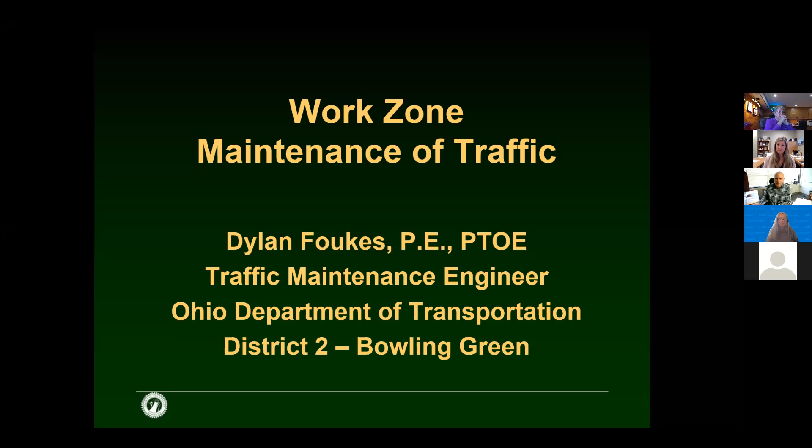All right, so yeah, that's what we're here to talk about this afternoon. This is me, Dylan Foukes, traffic maintenance engineer, Ohio Department of Transportation. I'm in District 2, which covers, we're out of Bowling Green, which covers the 8 counties in Northwest Ohio.

There, it finally goes. So we're talking about work zones, we're talking about temporary traffic control in those zones, and what is the purpose of it? We're trying to communicate with road users what's going on through a roadway that has been affected from its normal operation. Normally, on a typical day, you don't have anything in the roadway. Well, then all of a sudden you might have maintenance activities. You could have something, the road could be flooded. There's a number of things, you could have a utility pole that's down. Whatever has changed from normal roadway characteristics due to some type of thing that's now in the roadway, we're having to deal with how do we get drivers around this area, either through the zone if there's room, or if we have to detour them another way.

All these things I'm going to talk about today come from the Manual on Uniform Traffic Control Devices. This is a federal manual that covers throughout the U.S., providing the minimum standards for all public roadways. Each state and even local municipalities can go above and beyond this. In Ohio's case, we have the Ohio Manual on Uniform Traffic Control Devices, so we have things that build upon what's set as the minimum. You could even have municipalities that go even a step further, but that's what we're working off here.

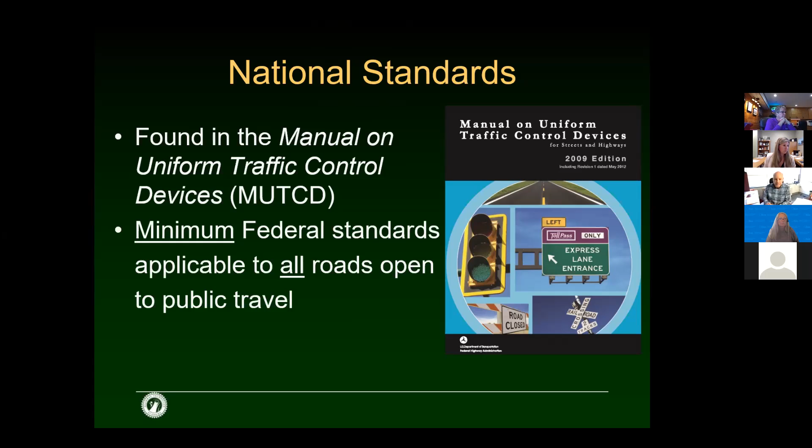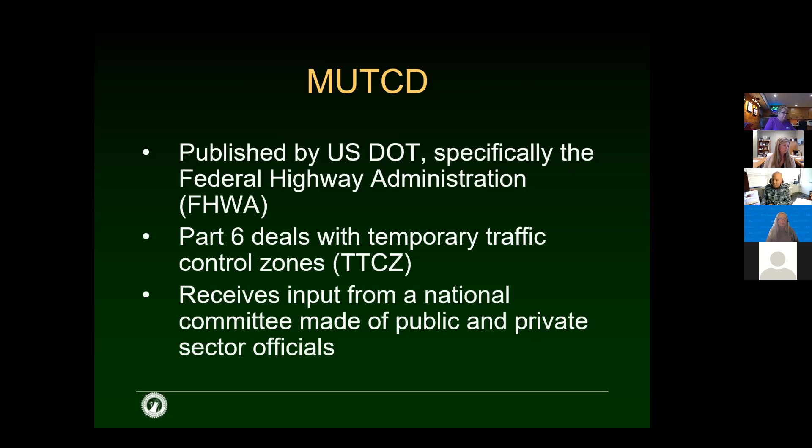Again, this is something that's published by the US DOT. I'm going to talk about part 6, which is temporary traffic control zones. This is updated - we're actually working off one that's from like 2012 right now, so they're discussing a new one coming up soon. There's been discussion about different formatting and different things about it, but I know there's a national committee now that's looking at releasing a new update. Each of the parts within the MUTCD get updated, and each state then looks at it and decides what they want to build upon that.

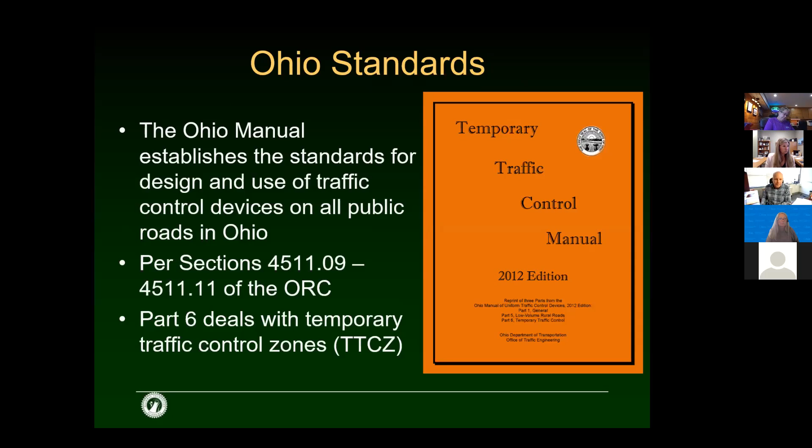So when we're talking about traffic control devices, we're talking about signs, cones, barrels, the arrow boards that you see out there that tell you the lane's closed, message boards that are helping provide extra information, pavement markings that we got to change due to whatever type of work is going on there that's long-term. Then we have our barriers that are either there to protect the workers by keeping vehicles out of that zone, or if we're just talking about barricades and things like that to help tell drivers they need to go a different way.

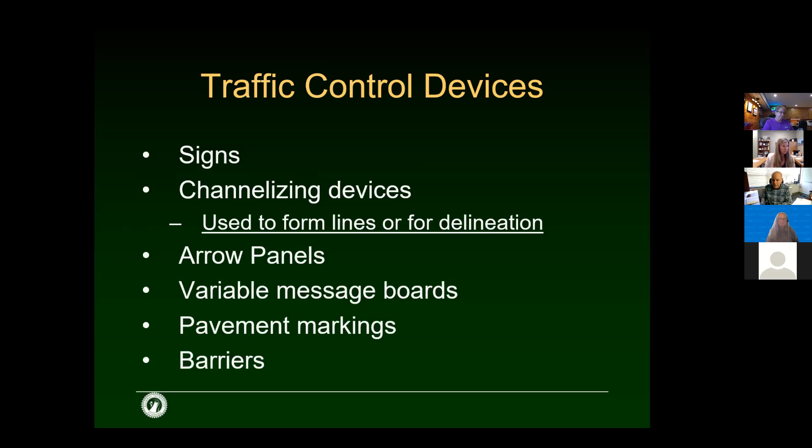So when we get into the work zone, it's made up of a number of components here. First one is the advance warning area. This is where we're going to start telling the driver that something's coming up. You got to let them know, hey, up ahead there's something that's not part of the normal roadway. And how do we do that?

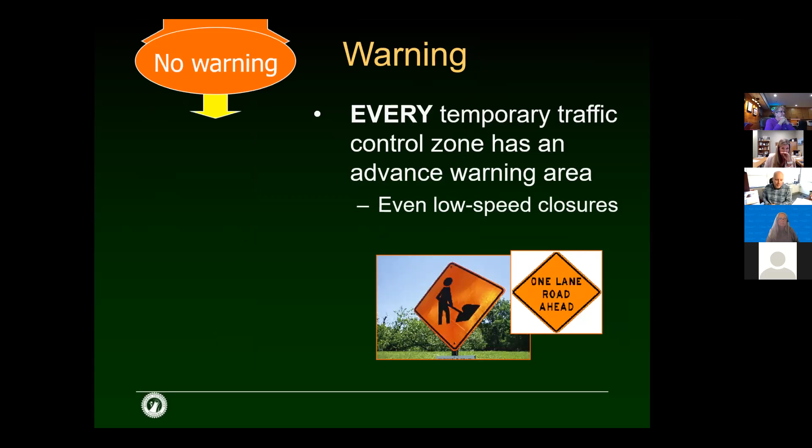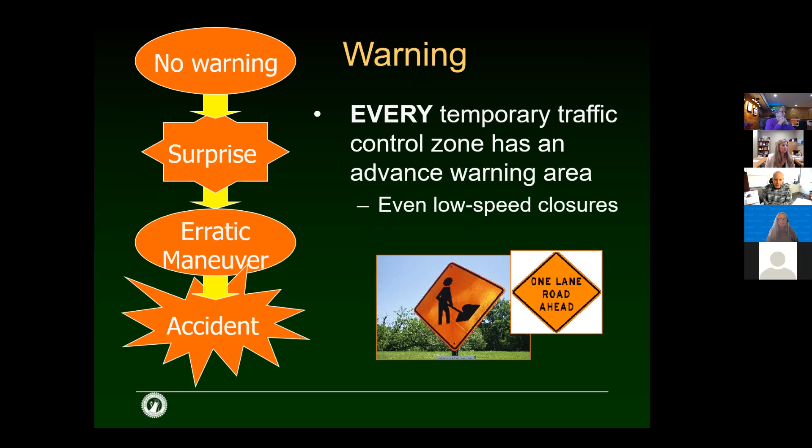We're doing that with signs. Typically, the signs are out there telling people that something's coming up. If you don't do this, as you can see in the little graphic there, there's no warning, it surprises people, and you may end up having an incident. So that's the key - get those signs out there and make sure drivers are aware of what's coming up.

So again, get their attention. Road work ahead is the first sign people always see. Then you got to tell them what the situation is. In this case, if you're on a divided highway, like I-75, you're going to say right lane closed. And then you got to tell them what to do: they got to merge left. So those are the sequence of things you're telling people as they're approaching a work zone.

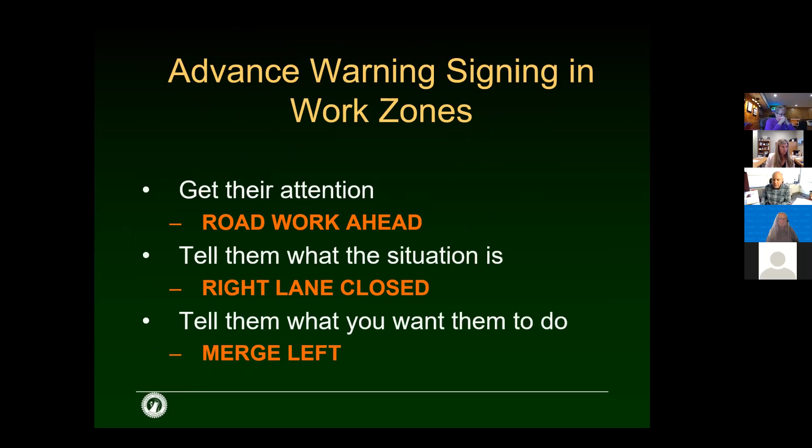Sizes of signs, the sizes we put out there, anything you see, we have those roll-up signs, which we'll show a little bit here, but those are all 48 by 48 inches. Those are meant for high speed, higher visibility. And as you go down in the lower speeds, you can go with smaller sizes.

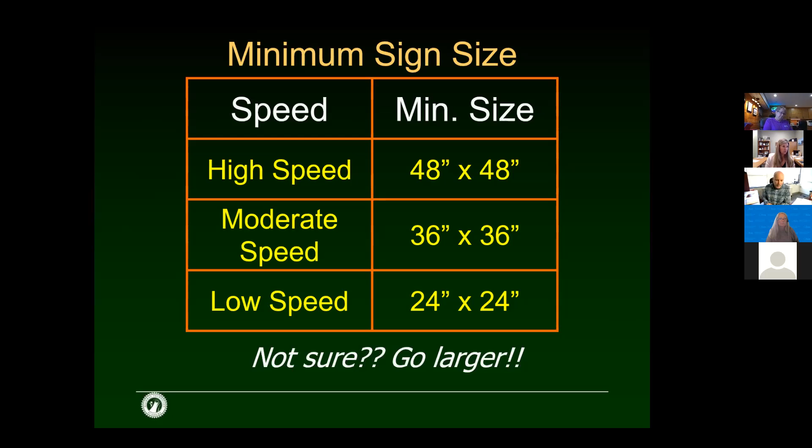Positioning of signs, you want to put them where they can be seen. On a divided highway, you put them both in the median and on the right side of the road. You're trying to get them in a place where people can see them easily and have time to respond as needed.

Unfortunately, when you get into a downtown or urban environment, it's harder to find places to put signs, and also you're fighting for people's attention with all the other things going on. You got parked cars, you got storefronts, you got their signs. So there's always a lot going on in a downtown area that you really got to try and get people's attention.

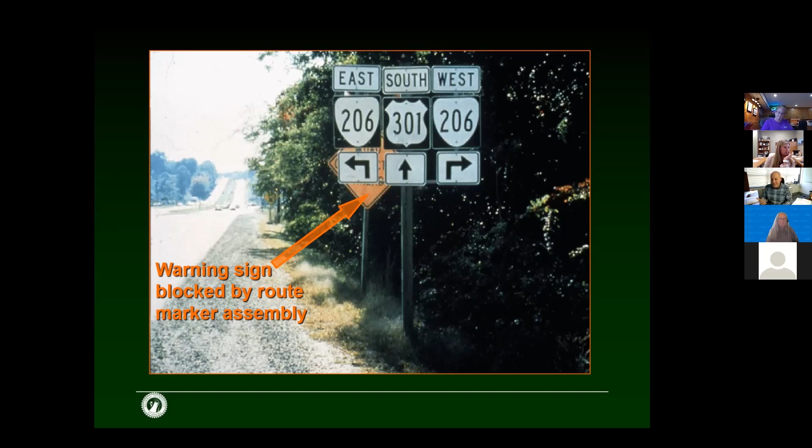This is just a personal pet peeve of mine. There's a sign in place, and then they go put the warning sign that there's construction right behind it. Now in this case, probably somebody had a plan that said, here's the plan for our project, and all they did was follow this. It says it's supposed to go at station 150, so they go out and put it in at station 1 plus 50. Well, they didn't take into account that the sign's there. Maybe that wasn't there when the plan was created, but it's there, so you got to make adjustments. You got to think about, hey, is this really something someone's going to see? It's kind of pointless to stick it right there behind that other sign.

Also clusters, that's another thing you want to avoid. You have enough things out there trying to get people's attention, and you don't want to put them all with the other signs around it. So in this case, you either want to remove or cover those other signs so that people can see the ones that are critical to what you're actually doing on the roadway.

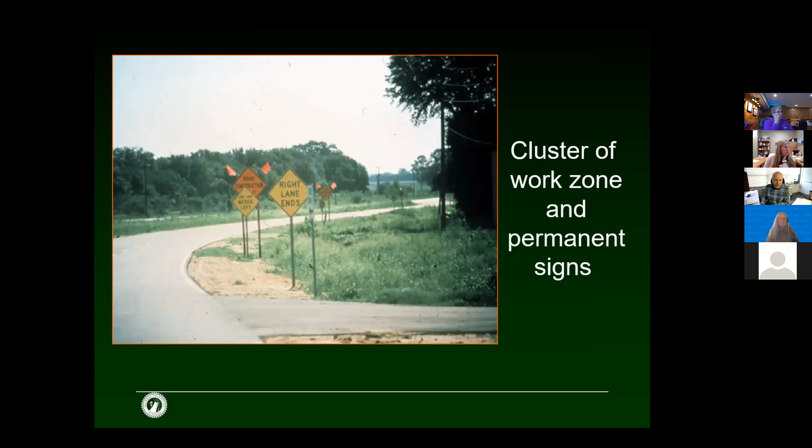Sign spacing is another thing, just like sign size, it's a function of speed as far as how far apart they're spaced out. And then also the environment - like I talked about, in urban areas you're going to have tighter spacing, and you also got to deal with curbs and pedestrians.

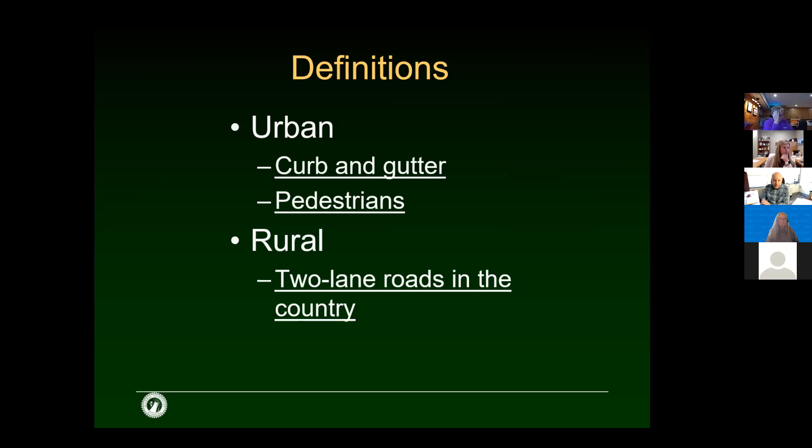Rural situations are a lot easier to deal with. They are higher speed, but usually have a lot of room out there in the rural area. And then expressways, freeways, I-75, we're going to have a really long gap in how far out we place those signs, because people are traveling 70, 80 miles an hour. So you need to space them out further so they have time to comprehend it and then react.

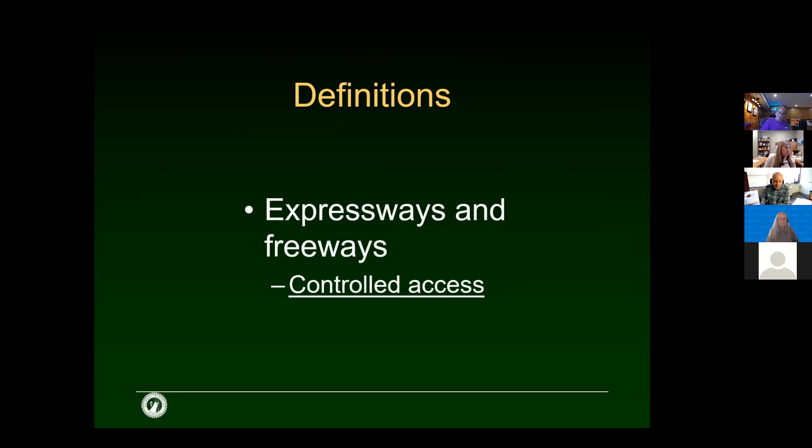Here's a chart that shows the type of spacings that you see.

The next slide shows it - the A, B, and C positions. The A is closest to your work area, the B is intermediate, and the C is the farthest back. If you go down to the bottom of the chart, you see 1,000, 1,500, and 2,640.

So you're really looking at basically a mile when you add all those together, from where that first sign is seen - the road work ahead sign - to when you're actually getting to the point where you have to do some type of maneuver, like a right lane closed. Going to that bottom case, a mile back, that's the C position - that's where your road work ahead sign is. The next one, B, is where you'd say right lane closed, and the A location would be telling you you've got to merge left.

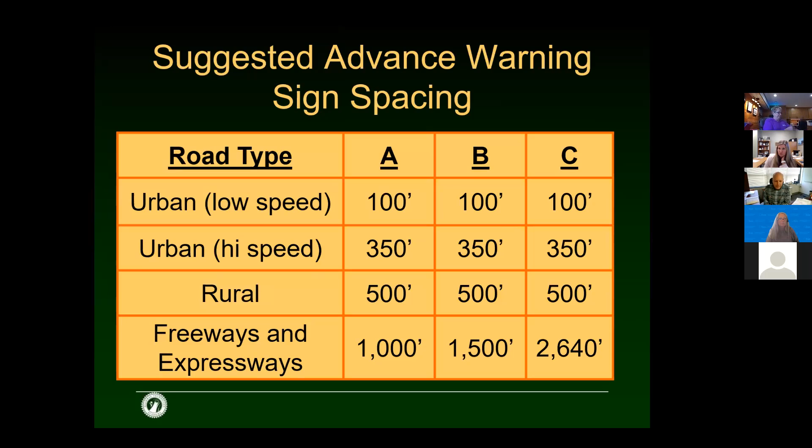So going back here real quick, in a rural location, a 2-lane road where you're just doing a flagging situation, you're going to be looking at 500, 500, 500. Pretty easy - it's easy for our guys setting up signs in the field to know that we're out on our 2-lane country road, so it's 500, 500, 500 to set these signs up.

Height clearances. Now these signs that we're placing are for temporary use - they could be up for a couple of hours, a couple of days, or months, depending on how long you're going to be out there. Typically for our short-term projects, you just have to mount it at 1 foot off the road.

Going back here real quick - post mounted. We're going to post mount signs that are there for a long time; we're not putting them on a temporary type of support. These are the ones where you're going to drive supports into the ground, and they're going to be there a long time. So if you're in a rural area, that's 5 foot to the bottom, and in urban areas, 7 foot.

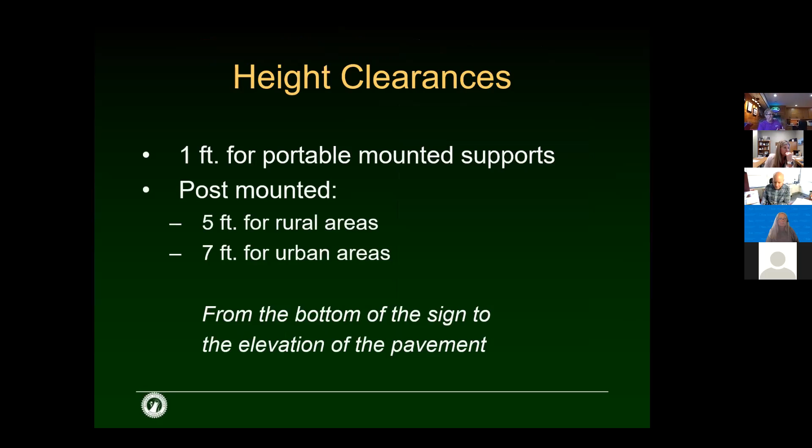And here's that sign, and here's something you would see post mounted. That matches what our typical permanent sign is actually. So that's what you're going to have up there for a long-term type of project.

Again, here's showing urban, 7 foot. You want to get above so you're not blocking any sight views and people aren't banging their heads on it. Not that you have a lot of 7-footers around, but you never know.

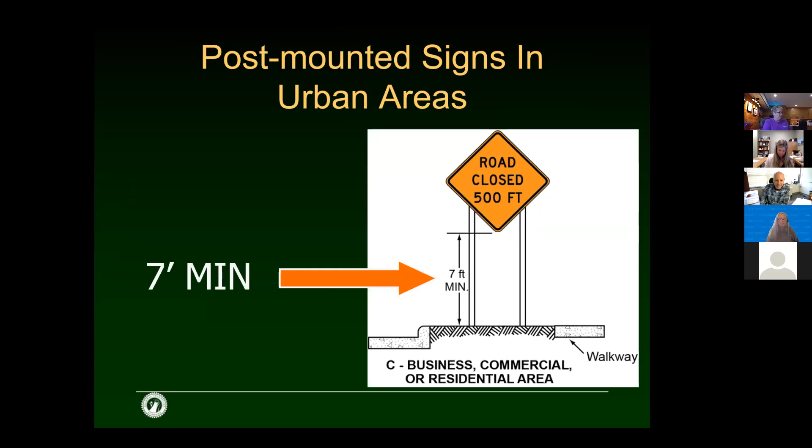So we're talking about tapers, taking people over from a lane that's closed, moving them into the lane that's open. That's where our cones and barrels, and if it's barrier wall out there, we're going to have that - all those things. If it's long-term, we're going to have pavement markings that match up with that as well.

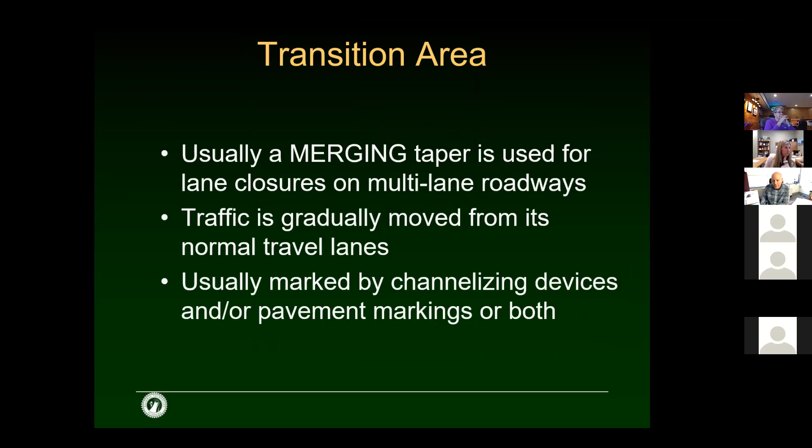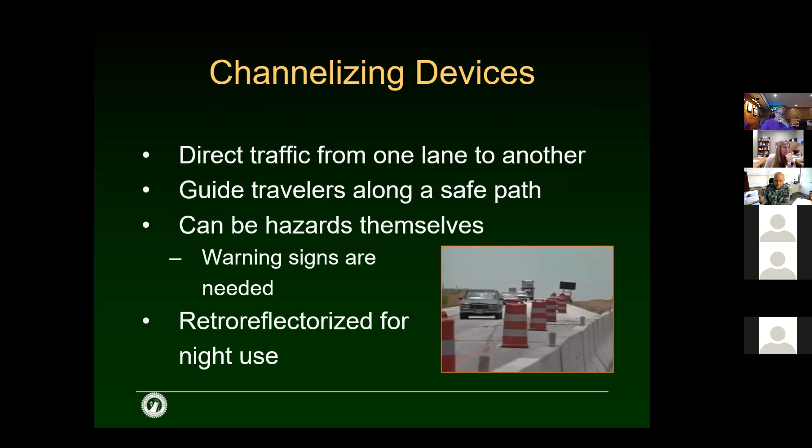The devices that we're using are referred to as channelizing devices. They're there to direct traffic from one lane to another. They're reflectorized for nighttime - we used to have to put lights on all the drums that we put out there, but the sheeting has gotten so much better over the years that we don't need to put lights on them anymore. The light coming back from the headlights is enough for the drivers to pick up easily.

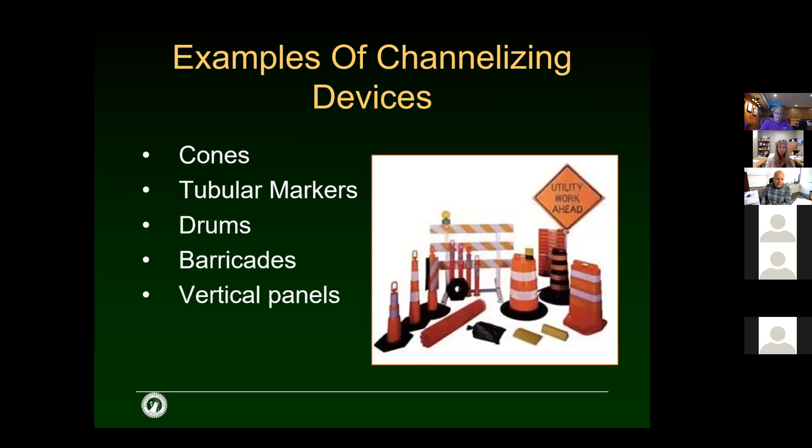Here's just a variety of them - you've got cones, drums, tall skinny barrels that we call grabber cones because they've got a little loop up on the top. Those are the types of things that we're typically looking at.

The cones and tubular markers, depending on your use, can be as small as 18-inch for a daytime low speed, or 28 inches - that's what we buy for all of our stuff, 28 inches. But we won't use those on the freeway.

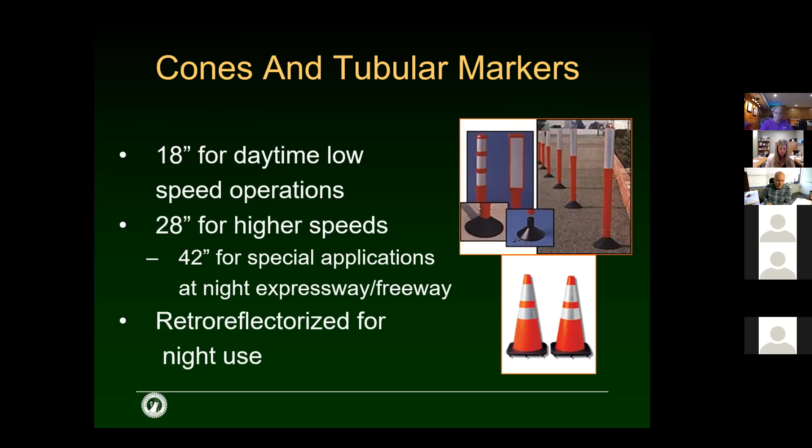When we go out on the freeway, we're using the taller 42-inch grabber cones, which you'll see here. This is a type, so it's still considered a cone, but it's kind of a skinny barrel. It has the height, and it just gives people more of a target to avoid, I guess, better than a cone.

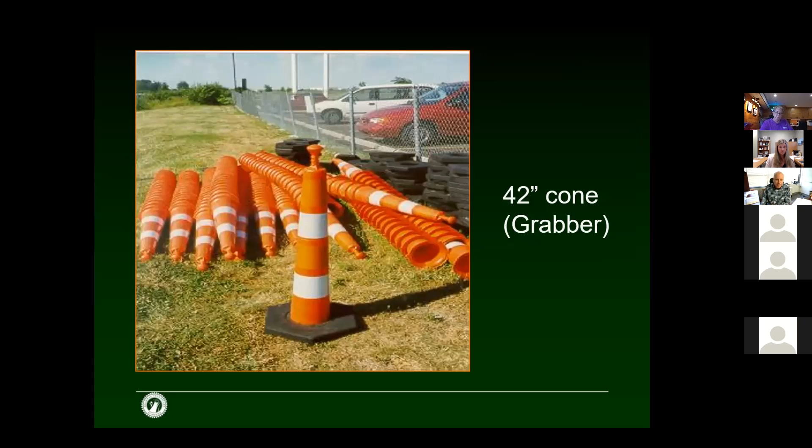Drums are the biggest thing that we put out there as far as channelizing devices, so it sticks out further and people don't want to hit them, so that's a good thing. But every year we're buying new ones. We just bought some—we buy a couple hundred every year for our district because they get beat up over the summer, so you've got to replace them.

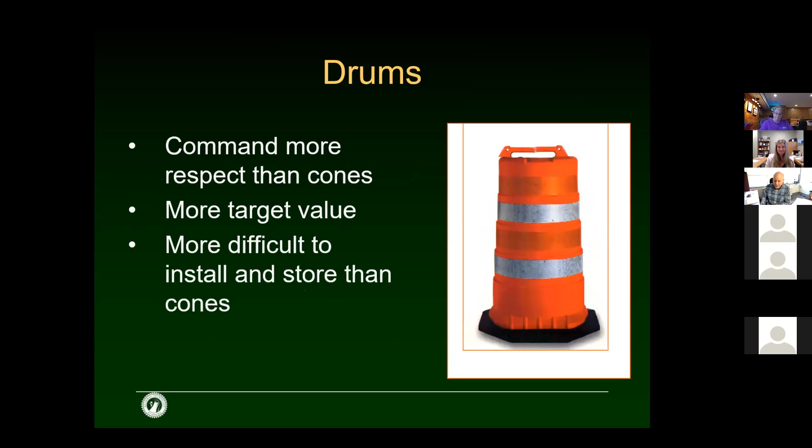Barricades—these are where you're coming to see a road's closed ahead. We'd hope everybody obeys these when they get to them. Typically you've got a road closed sign on it, but a lot of times, especially when a closure first starts, people just drive around them to see if the road's actually closed. But when those are up, the roadway is closed, so we hope people pay attention to that.

But the biggest thing these days is people's GPS—their Waze or Google Maps is telling them to go this way, and they're not aware that there is a closure. So it's not on their GPS, but they just go right by the barricade, even though it's saying road closed ahead.

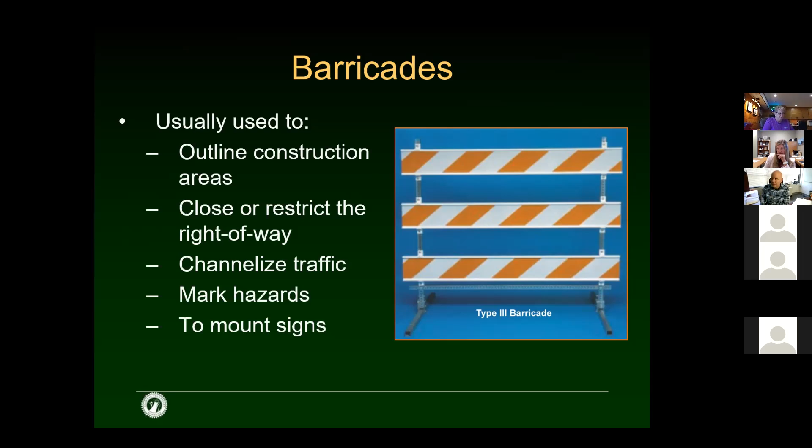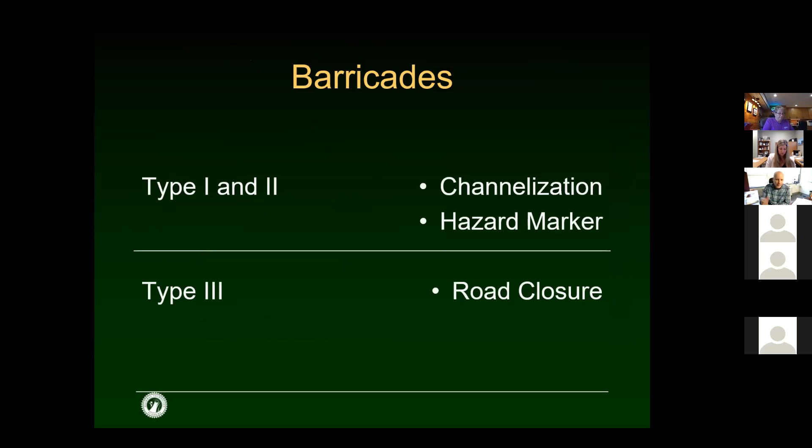It's actually 3 types of barricades—type 1, 2, and 3. All we use is the type 3 triple rail for our road closures. Again, that's just telling you what they're used for.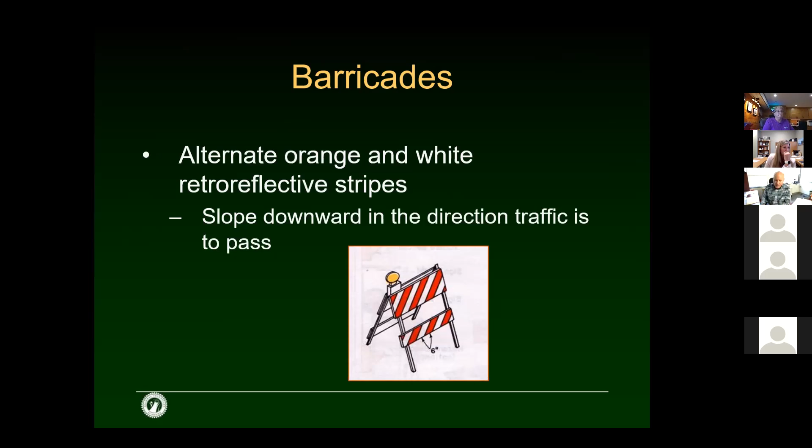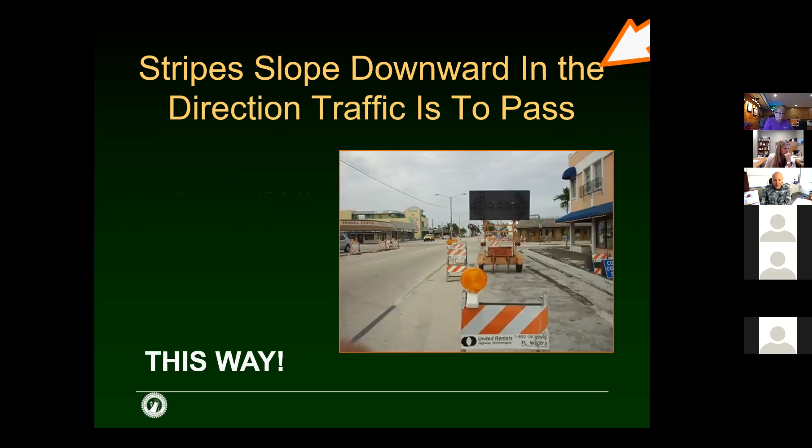They do have the orange and white stripes on them. Those actually—I didn't know this until I got started working in the transportation field—point to the way you're supposed to pass the barricade. The next slide shows you: the stripes are pointed basically down to the left, so that's the way you're actually supposed to pass the barricade. Not many people recognize that, but it's just one of those tidbits of information.

Now, spacing these out—again, factor speed on how far apart you're going to place your drums or your cones. As you see on multi-lane roads, it's 1 times the speed limit in feet, and then as you get into straight tangent sections, you can go 2 times the speed limit. Again, those are the max spacings. A lot of times when we're talking about these things we're either giving min or max—this is the max spacing.

The skip lines on the roadway are 10 feet of paint and a 30-foot gap, so those are every 40 feet. So when our guys are placing out cones or barrels, that's what they're using to figure out how far apart they're going to place those devices.

So if you have a 65-mile-an-hour road, at max spacing on the taper it's going to be 65 feet. But if they're looking at the markings, they'll move those in a little bit, knowing that the spacing on the pavement markings is every 40 feet. So that's how they'll space those out on those tapers.

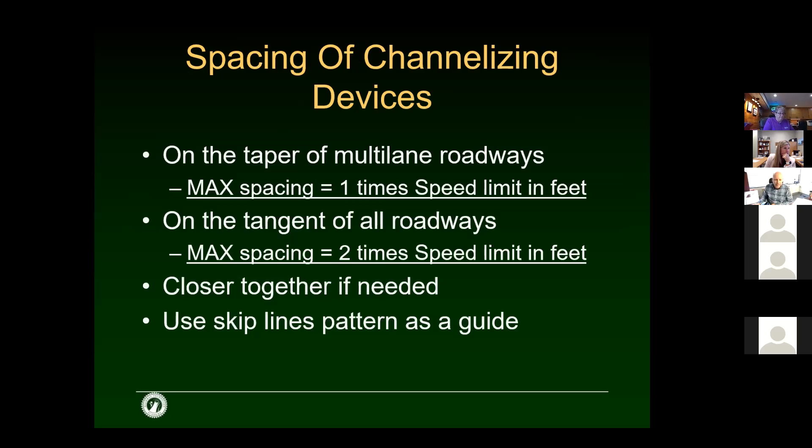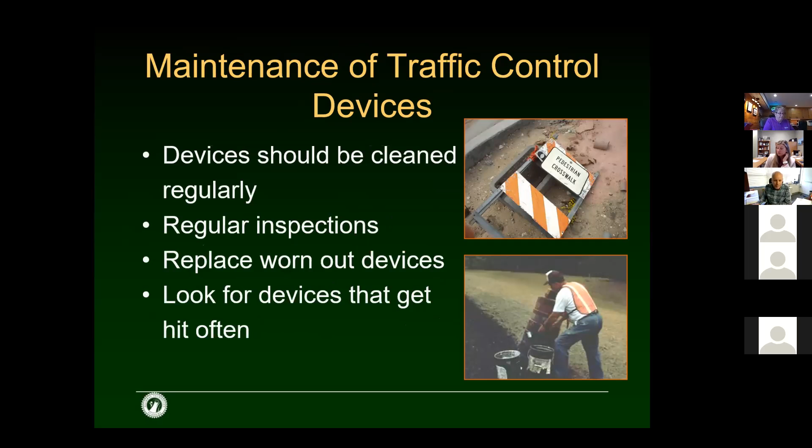Again, this is just talking about our devices—when they're out there, they should be in good shape, and this is in all of our documentation. When we have a contractor, you've got to keep these things in good shape. We don't want things that have been beat up or destroyed being out there, so we need to keep up on them and replace them as needed.

So now we get past the transition area and we're getting into the work area, which is basically broken into the buffer space and then the workspace. Workspace is where you're actually doing your work with people and equipment—that's the point of why you're out there. The buffer space before that is to leave space for any errant vehicles that happen to miss all the signs and tapers, and make a last-second maneuver to try and avoid things.

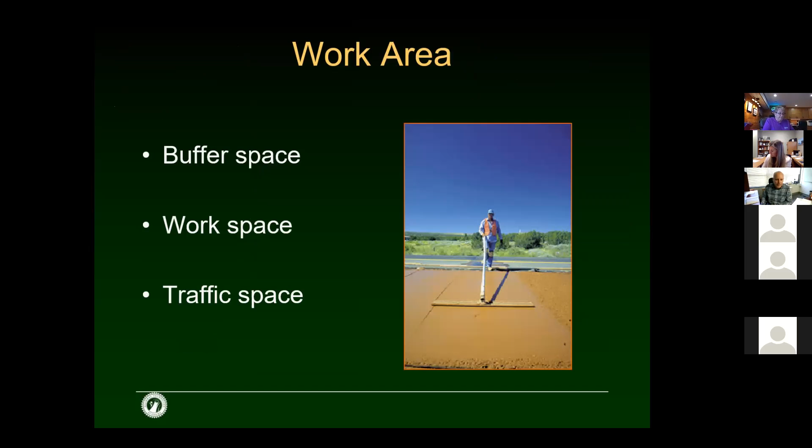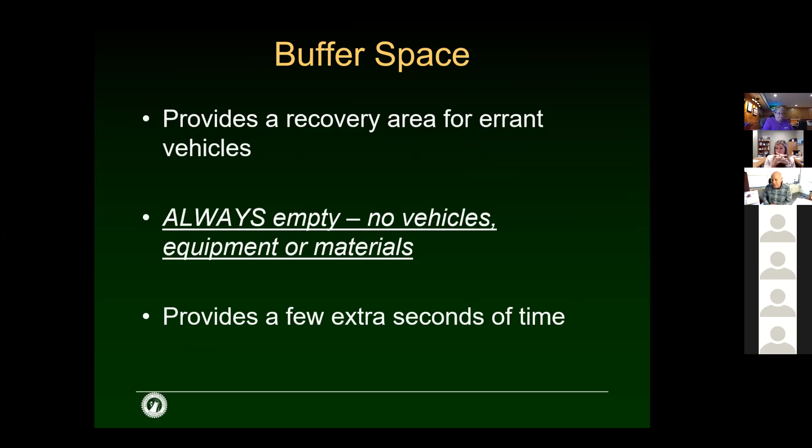Buffer space provides a recovery area for errant vehicles, and you want to keep it empty. You don't want any fixed objects in there, and you don't want parked vehicles, so that if somebody blows through the taper, they're not going to hit a vehicle. You need to keep those empty.

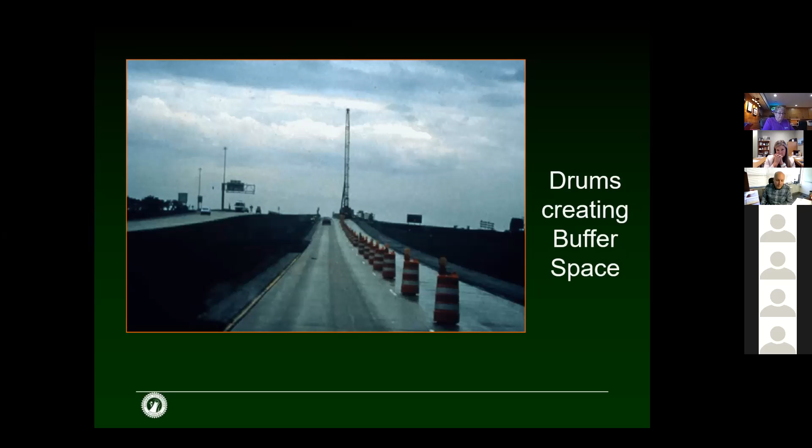Here's a diagram of it. Sorry for the old photo, but you can see there's a bridge project here, with a crane sitting up in the lane that's closed. You've got a long buffer area in case somebody blew through that area. You don't want them to run into the crane. So that's how you give them some time before they get there.

Again, it's a function of speed. On an interstate route, 65 miles an hour, you're talking 645 feet. So it's a substantial distance that you're going to put in there to keep it clear.

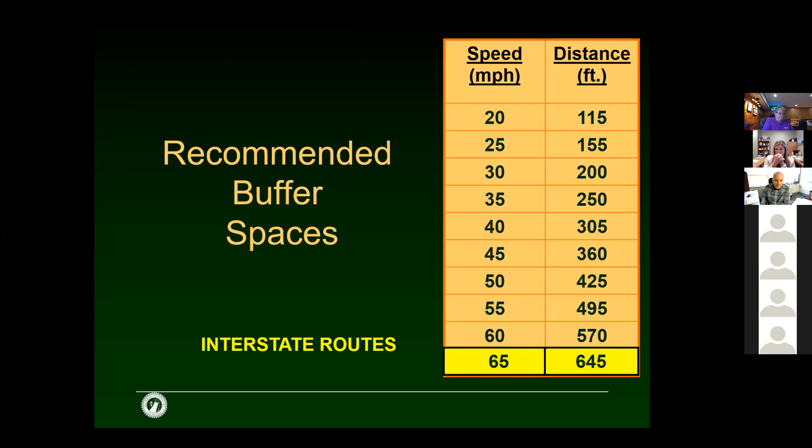That gets us into the workspace. That's where we're actually doing the work. Overall, we're minimizing the conflicts in that path with the traffic space around the work area. That's highlighted here - that's the lane that's free and clear that we want everybody in to get around our work area.

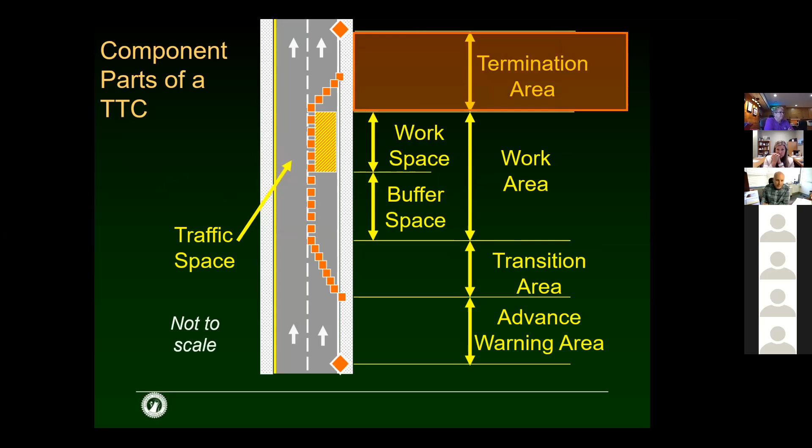Then we get by the work. Now you're in the termination area where you're getting people back on their regular travel path. That's after the zone, and people can look forward to resuming normal speeds without interruptions.

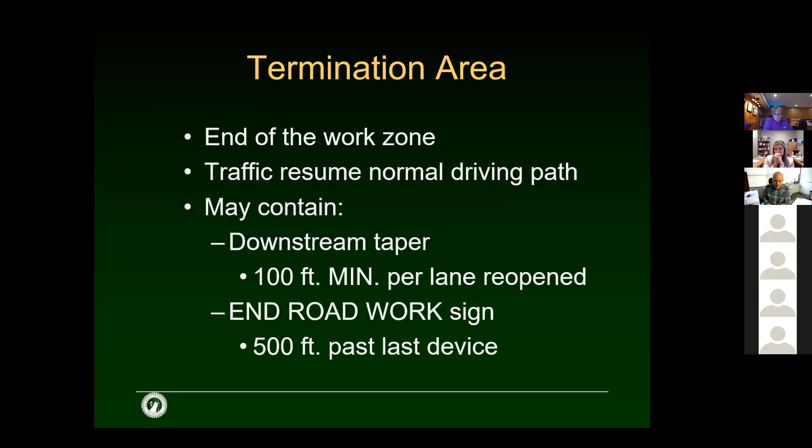Typically at the end, we might have a 100-foot taper. If it's a longer term setup, we'll put an end roadwork sign. Typically, we don't put those up for daytime closures if we're out there not very long, because it's just an extra sign we have to put up and then take down. Obviously, if it's a daytime thing, we're gone, so you don't need to have it up any longer.

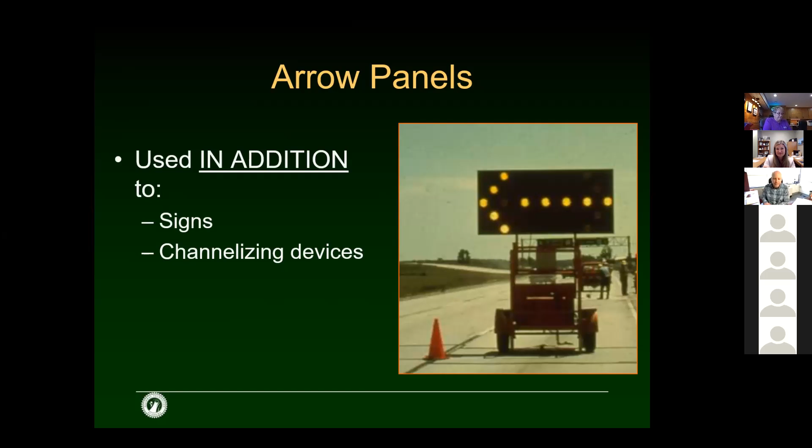So we talk about other supplemental devices: arrow boards, message boards, portable signals. Here's everybody's favorite, the arrow board. This is the one that grabs people's attention the most. They might see the signs that say right lane closed ahead, but they don't really believe it until they get up to actually see the arrow, and then it's like, okay, now I got to get over. So those are there to move that traffic over.

It's there to supplement the advanced warning signs. You've got to have the advanced warning signs, but on top of that, you've got the arrow board as part of Ohio's standard construction drawing for a lane closure. But could you do one without it? Yeah, sure.

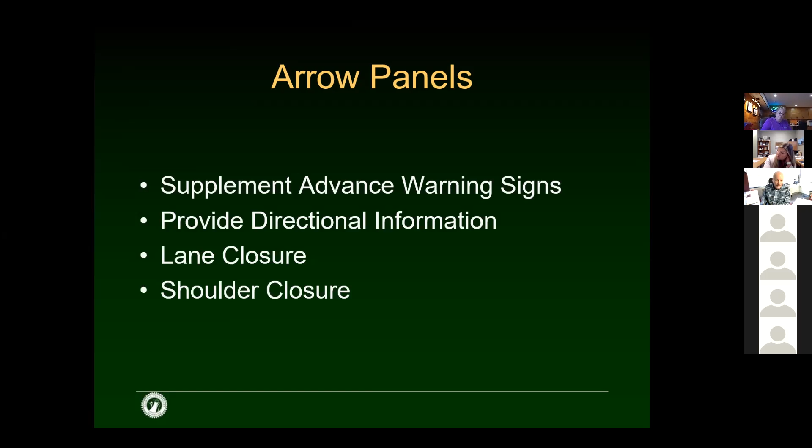Again, we're talking about lane closures, shoulder closures only. It's not there to move traffic around, and we'll get into that. Also, the sight - you can see it from far away. It's lit up, and it's definitely the thing that gets attention.

As I mentioned, you're moving traffic into a different lane or closing the shoulder. You're not using it for a flagger situation or anything else.

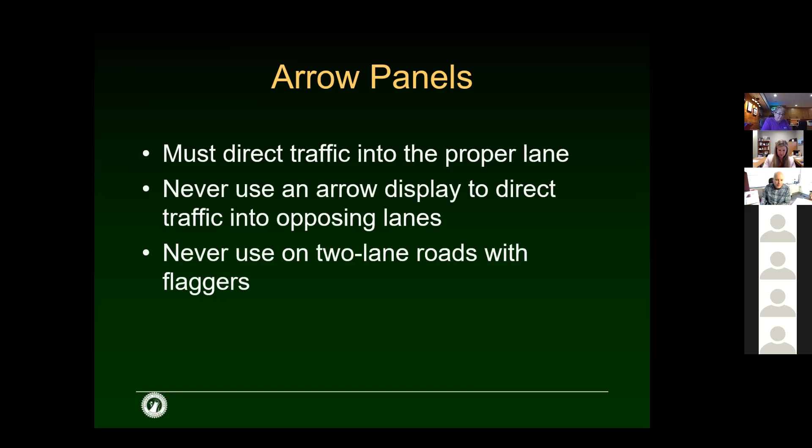Size again with these can vary depending on the type of roadway. We end up using just the largest one because that covers you for whatever type of situation. But if you were a small municipality, maybe you could get by with a smaller one. Plus, you're gonna be dealing with tighter roadways, urban environments, so you may not have room for a larger board.

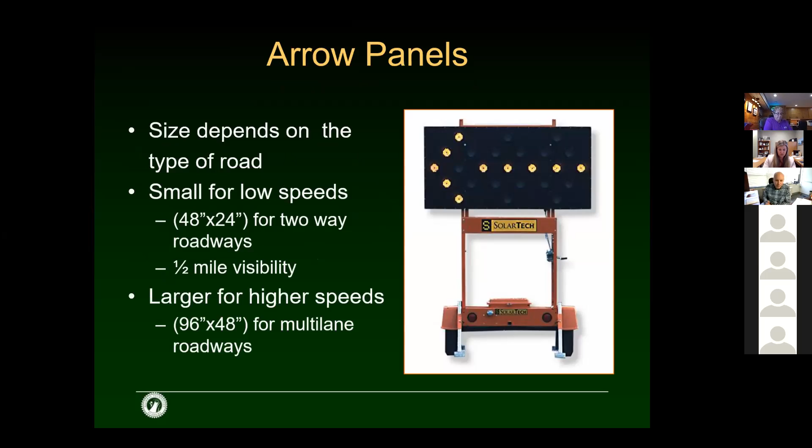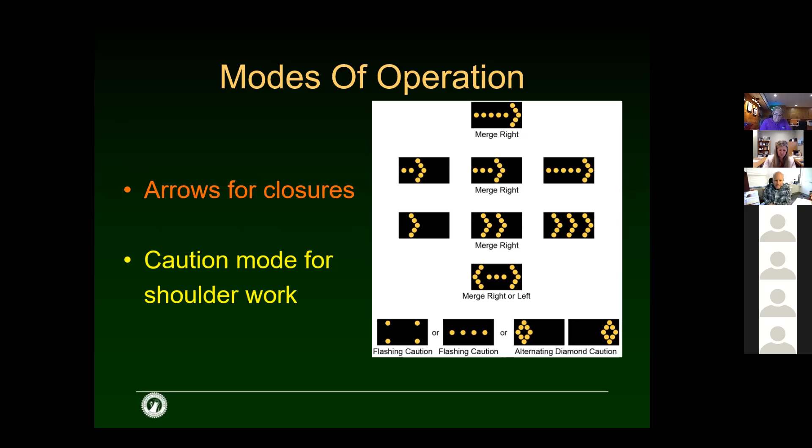Various operations of the board, pretty typical here. The arrows are for closures. The caution, typically for shoulder work, we're using the 4 dots there in the bottom left of the diagram. That'll just flash, and that's telling you that the shoulder is closed.

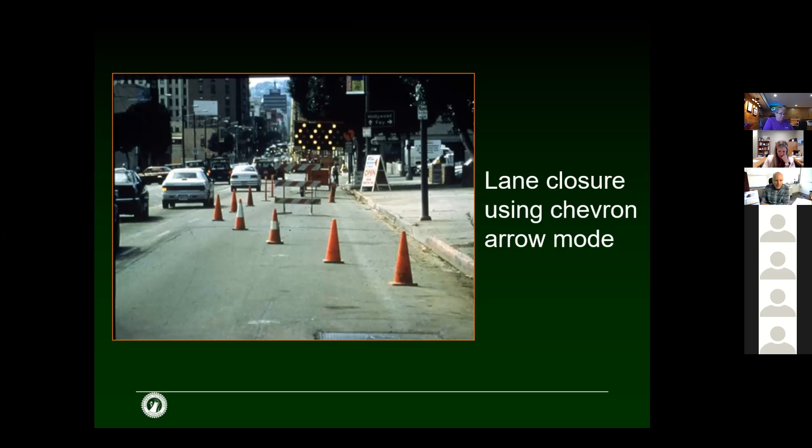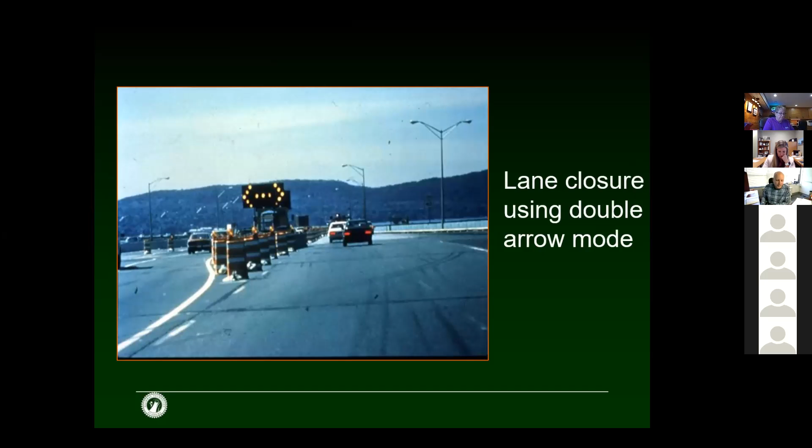These get a little tricky, but you can close the center lane and have people go on each side of it. Usually you don't like to do that, just because - well, we will do these at some of our long-term crossovers on the interstate - but typically you try to avoid some of these just because it creates a target straight ahead. So if you don't move, you're going to run right into that.

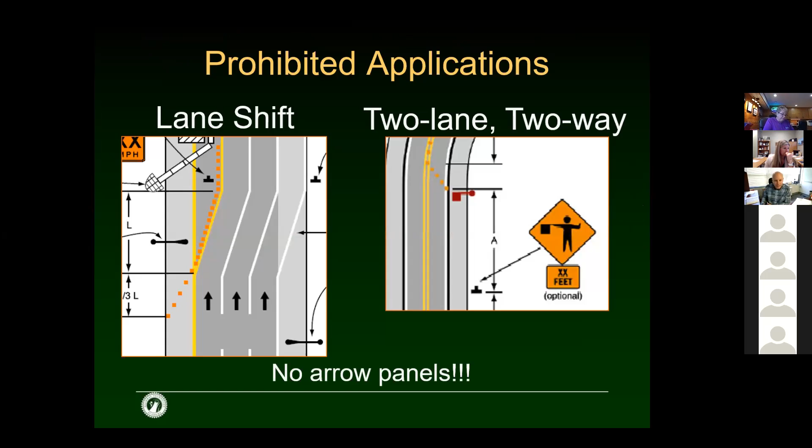Again, we're not using it to shift lanes over or shift traffic, and you don't use it in a flagging operation.

Message boards, these are the things we try and get out there as much as possible. They grab drivers' attention the most. They might drive by 10 signs and not pay attention, but the message board will typically grab their attention.

So we like to get messages out there, especially in advance of road closures, any major type of events, just to let people know what's coming up, when it's going to happen, and then when it's actually in place.

A lot of these today have remote communications. You can, from your desk or from your home on the couch, open up your phone and program them however you want. So that's a nice feature these days.

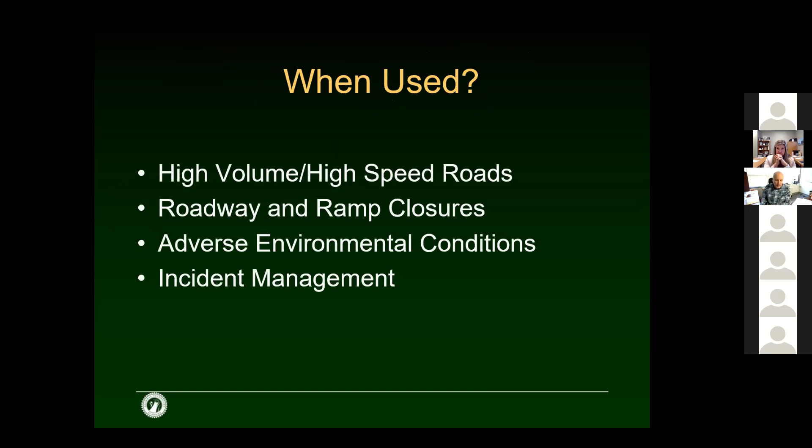When you use them, pretty much any main closures, obviously with high volume, high speed. If you can get them out there for incident management, that's great too. They give that visibility of seeing them. You can see them from far away.

The one thing we stick to is no more than 2 displays in the message cycle. Basically, you have two messages you cycle through. Any more than that, people aren't going to catch them. They're already going to have driven by them. So you stick to 2.

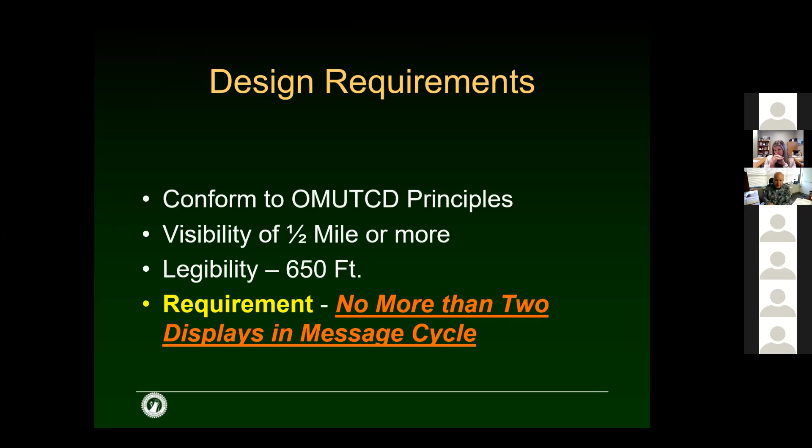Portable signals, we just in the last couple of years went from not having really any here in our district to now every garage has one of these. Once our maintenance workers got them on their jobs, they really liked them.

They could set them up and not really have to have the flaggers out by the roadway flagging traffic the whole time. And not only does it eliminate the flaggers, but then you have more people that can work on your job and not have to worry about traffic constantly. I mean, you got to worry about vehicles around you at all times, but you're not having to be active flaggers at that time.

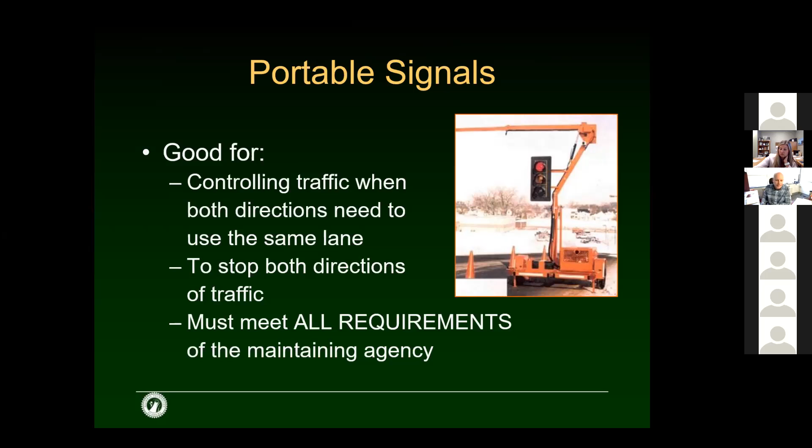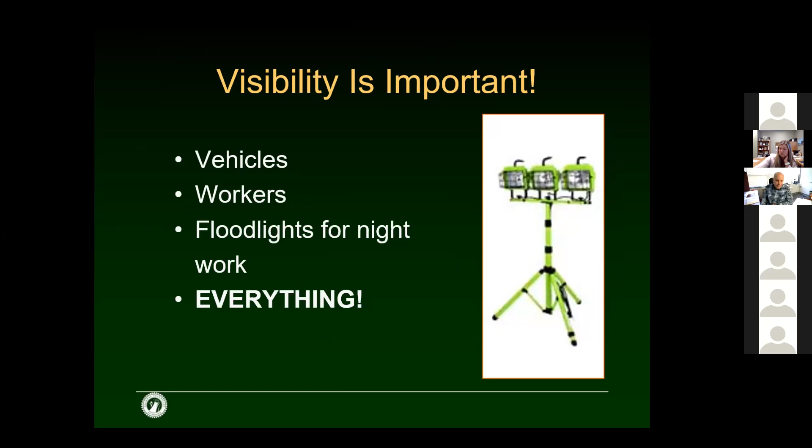If you're doing any work at night, visibility is key. So you want to make sure you got light for both the vehicles, so drivers can see you, as well as the workers being able to see what they're doing.

Again, we got various things on our plows and dump trucks that we have markings on them so they can see them at night, lights and strobes. That's day or night, obviously.

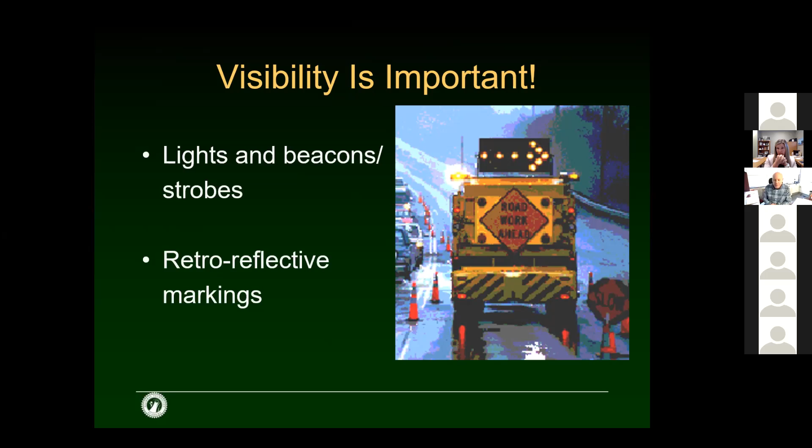So we get some complaints sometimes that the lights on the plows are too bright. But that's similar to what people say with law enforcement, the state patrol. Some of those times the strobes are so bright it's blinding to people.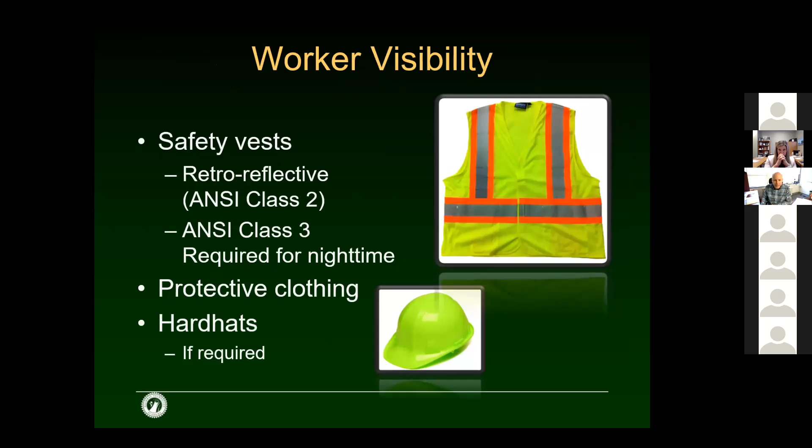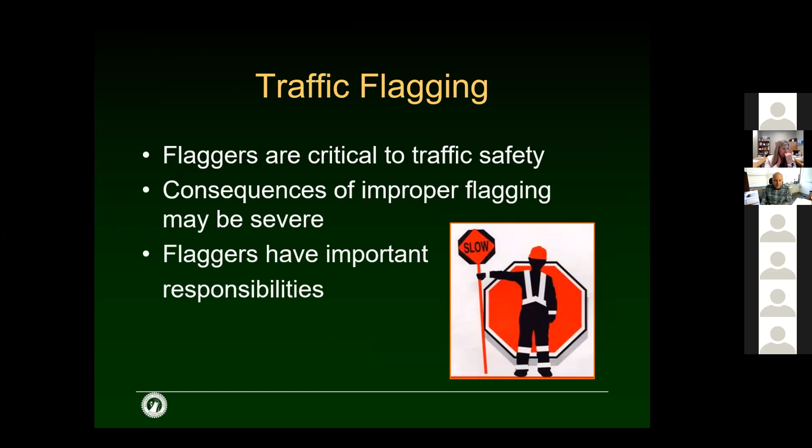So traffic flagging, obviously flaggers are critical to doing any work out there on our 2-lane roads specifically. They have the job of helping control drivers before entering the zone. We're not using them on high-speed multi-lane roads, just out there in the 2-lane roadway situations.

Why they're out there, you need to do it right. It's an important job. We tell that to people from day one that come into ODOT. Hey, this is going to be one of the most important jobs you do when you're working on the roadway is the flagger. We need you to do everything right because you're protecting everybody working in that zone, including the driver coming down the roadway. So you want to have somebody that knows what they're doing.

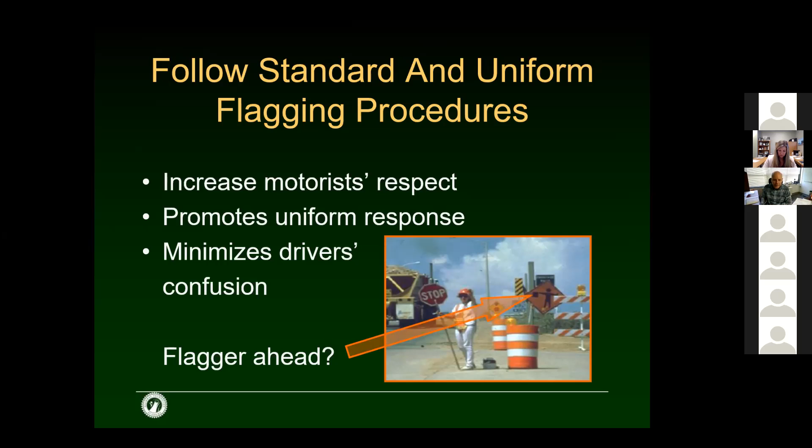Again, flaggers gotta stay with it. They gotta be alert at all times. You want to be visible. They stay on the shoulder - we have them stay on the shoulder until the point you have vehicles stopped. Once you've got vehicles stopped, you can then step into the roadway. You don't want to step out when vehicles are still moving.

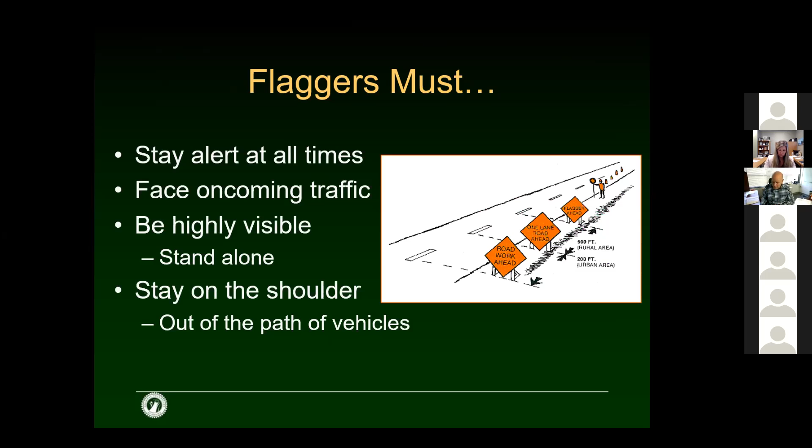We're always telling them to keep an eye on those drivers. Don't turn your back on them at all. Never turn your back on a vehicle because you're not sure what that driver might do. They're trying to relay information to motorists on stopping or slowing, whatever is happening at that time. So flaggers are responsible not only for their job, but for all the other workers in the zone.

Here's what you're dealing with - you get drivers that are a little drowsy out there, or you never know what's going on with the type of drivers these days. The biggest thing obviously is distracted driving that people are seeing these days. So that's why it's more important than ever to make sure they're paying attention.

Just talking about why it's with drivers - they're doing their own thing that day. We don't know what they're up to. They're probably distracted on their phones or distracted with something in life and not thinking about what's going on. So you've gotta try to control those drivers as much as you can. Other things that affect drivers: alcohol, drugs, their age, experience, weather.

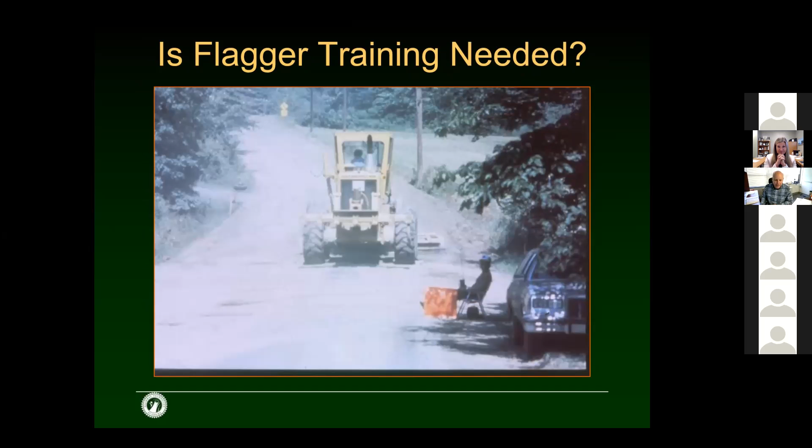You got a flagger taking it easy, not really doing their job out there. It looks like they got the radio out and are just taking a break.

There's ABCs of flagging - I'll just zoom through these real quick. Advance warning, be visible, alert, and C is for control. I won't get too much into any of this.

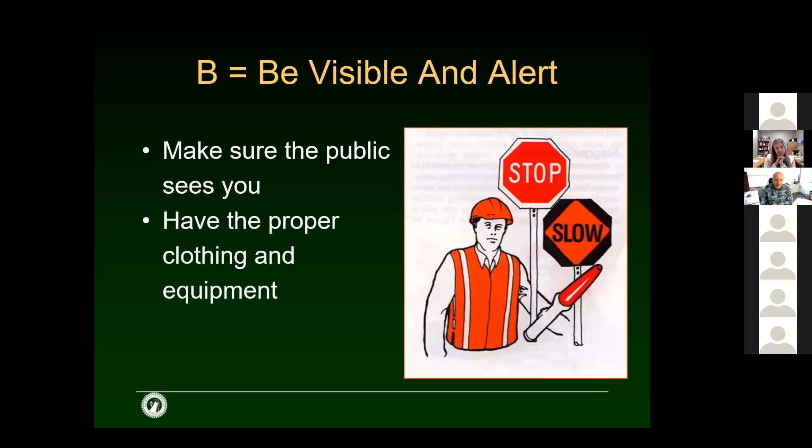This is again about being visible, making sure we have all the proper equipment out there. The guy is visible on the roadway. Equipment - you got the stop, slow paddle. Some of those come in roll-ups now that we buy, keep under the seat, a lot easier than the metal ones you're just throwing in the back of the truck.

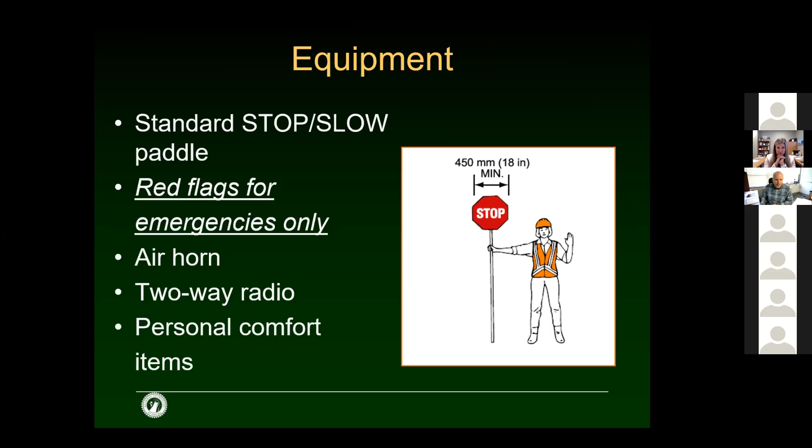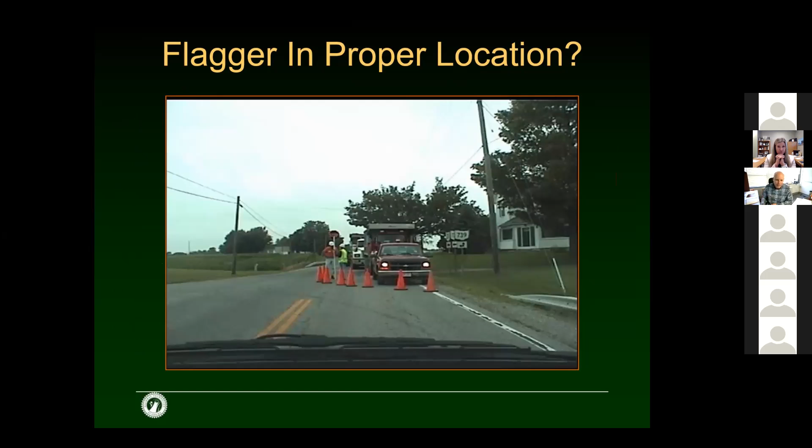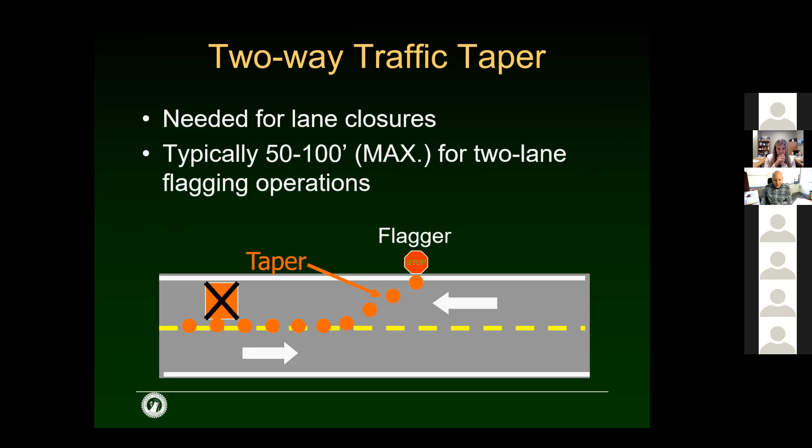And then just taper - typically use a 100-foot taper with the cones from the flagger where they're standing until you get to the point that you're getting around the zone.

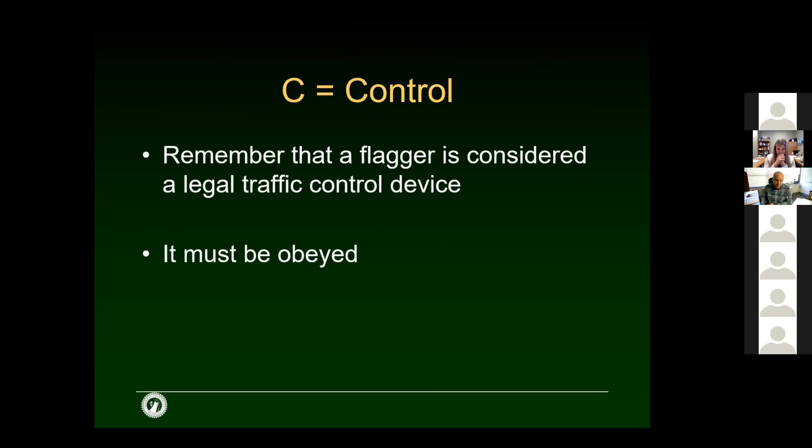Control out of the ABCs - the C is control, obeying the flagger, and the flagger is a legal traffic control device. So if somebody does something wrong and you have an officer there, they can cite them for failure to obey a traffic control device. So, ABCs.

Again, the public's counting on those flaggers to do an important job, as well as just traffic control in general. So overall, common sense, good judgment, and safety is key - making sure everybody is always thinking safety.

So that concludes it. Sorry if I flew through those too quick, and I don't know if I had any questions or if anybody had something specific to ask.

Okay, well, we will open it up to questions. We do have one that somebody put in the chat, and they would like you to explain safety corridor areas.

There was a district somewhere in central Ohio that was having a lot of crashes. They felt something changed all of a sudden and that it was the result of distracted driving. It was a corridor that had crashes that didn't make sense, people going off the roadway when there were no curves, things that made it seem like drivers were just on their phones.

So there was coordination between the State Patrol and ODOT, and this district created a distracted driving safety corridor. They put up a number of signs that said you're entering this corridor, and they kept track of crashes, which is what that district was doing.

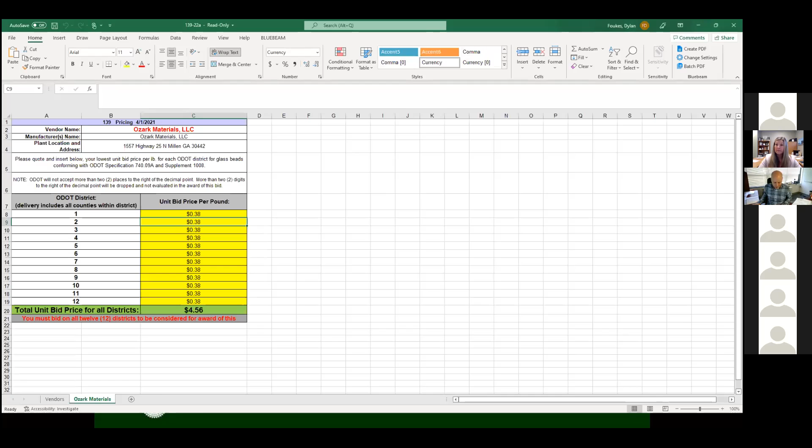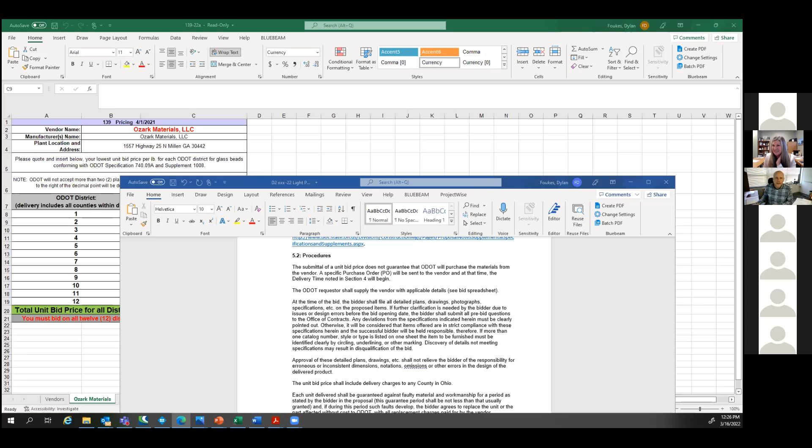Dylan, I'm not sure if you're aware, but we can see your other screen—we have an Excel sheet up. Oh, you can see that now? You might want to pull those down. Let me fix that. Okay, there we go. That was just a listing of the projects. We don't want to accidentally leak an ODOT document. Right, no secrets here, no secrets.